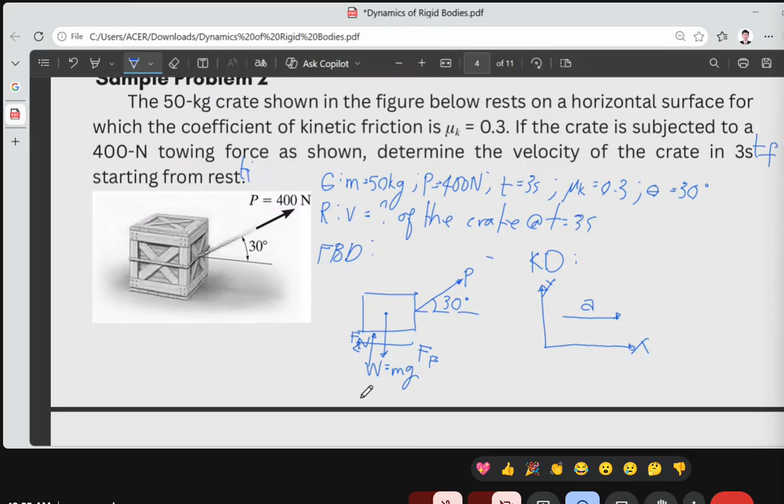So before we proceed dun sa solution proper natin, again, we must convert the given mass to the standard form, which is your weight. So weight is your mass times the acceleration due to gravity.

So the given mass is equals to 50 kilogram times yung kung ano yung ating acceleration due to gravity. Ano pong dapat natin gamitin in terms with your SI unit? Hello, audible po ba? Yes po, bali yung magiging gravitational acceleration ay 9.81 meters per second squared.

Okay, we have your 9.81 meter per second squared. And the answer for our weight, ano po ang weight natin? For the weight ay 490.5 Newton po. Okay, so you have here the 490.5 Newton.

So after determining the weight of the particle, we can have the summation of forces. For the summation of forces, we can first distinguish your y component. Kasi basically, most of the external forces that is acting on our FBD rely dun sa ating y-axis. So we have here the summation of forces in terms with your y is equals to m times your acceleration in terms with your y component.

And then for the establishment of our coordinate system, yung conventional way natin ng assumption, so positive upward. So sige nga, ano yung magiging equation natin in terms with your summation of forces in terms with y component, Claveria?

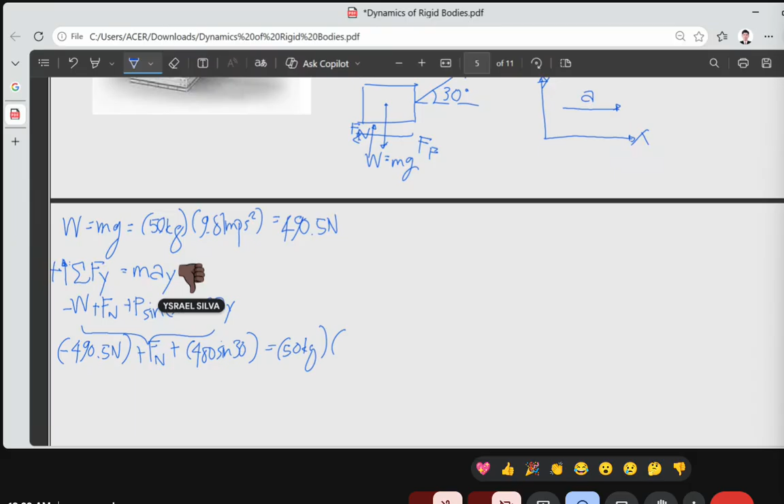Do we have the value for our acceleration with respect to the y component? Wala po. Bakit po sir? Kasi sabi dito sa problem natin, yung ating particle, yung movement niya specifically is the horizontal motion. Nasa x-axis lang siya. Hindi naman siya aangat, 2D yan. That's why yung corresponding value is 0, which means this term pwede na nating tanggalin.

So we can omit that part, then we can solve yung corresponding value for our normal force. Upon the mathematical manipulation, ang makukuha nating normal force ay 290.5 newtons. Kasi you're going to transpose this one, 490 maging positive siya, minus yung 400 sine 30. That's why you will come up with 290.5 newtons.

Nagsosolve po ba? Okay, sige po, so we can proceed. So after nun, we will have the summation of forces in terms of your x component. Yung assumption or the conventional assumption na meron tayo is positive to the right. So summation of forces in terms of x component is m times a sub x.

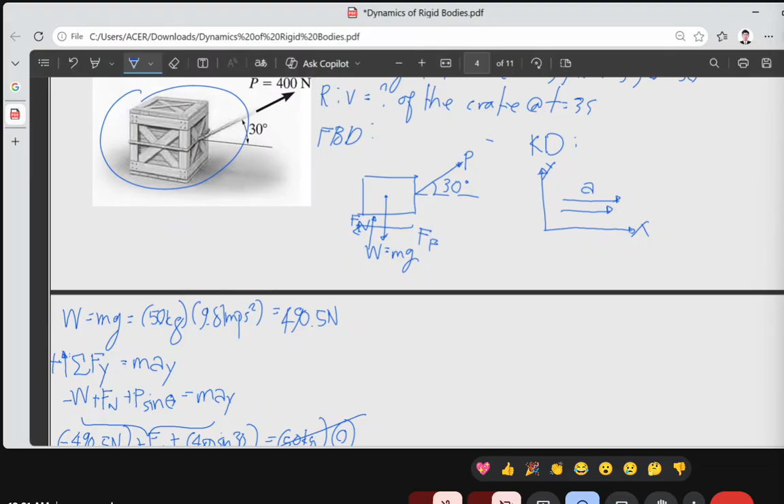Yung mga forces na nag-act sa ating horizontal axis, ano po kaya yung mga yon? Ano po yung mga external forces specifically? 0.3 na friction po. So lagyan natin friction force. Then yung P cosine 30 din po.

Yung applied force cosine 30, siya ba is positive or negative? Kung from to the right is positive po, okay, positive siya. Yung friction force po natin, siya ba ay positive or negative? Negative po, siya opposing.

So we can substitute or have the necessary parameters na unknown dito. For our friction force, it can be solved utilizing yung formula natin. Ano bang formula ng friction force natin? Sige nga, let's have magbuhat. Ang formula for friction force is kinetic friction times normal force.

Okay, that is correct. So ano po magiging friction force natin? Paki-solve nga po, Engineer Magbuhat. Meron tayong 0.3, tama ba? Ano ba yung kinetic friction natin? 0.3 times yung normal. Ang friction force po is 87.15 Newton. Tama po yan.

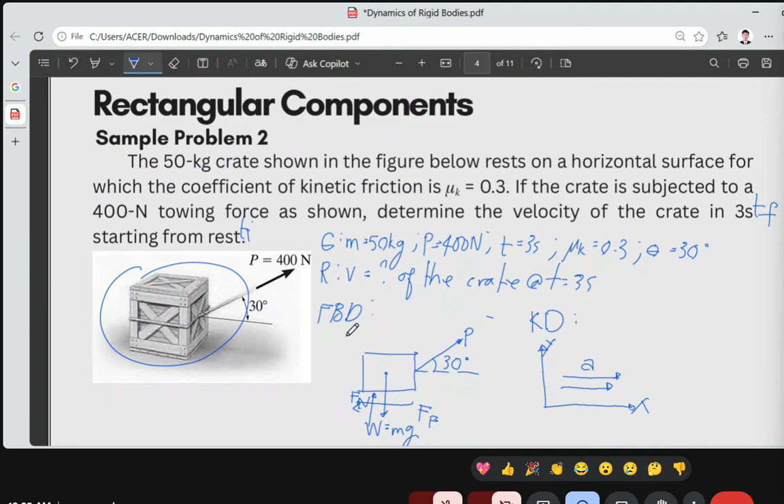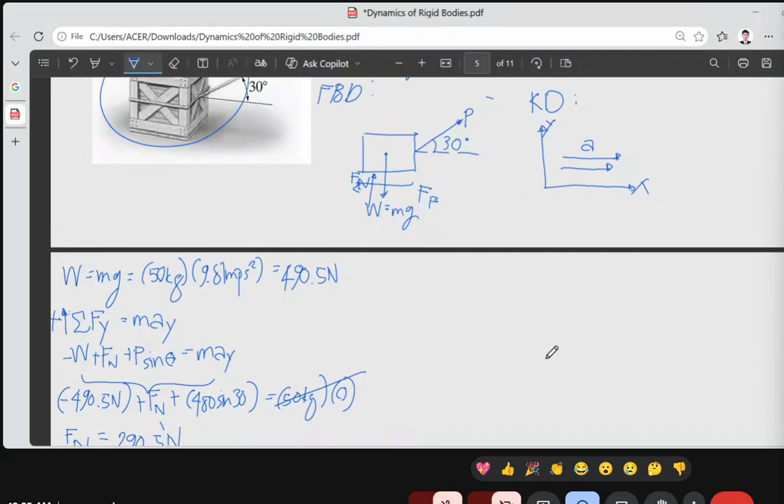So after nun, meron na tayong value na ating acceleration. Ang pinapahanap sa atin is yung velocity or final velocity when we have here the given final time. Alin po yung gagamitin natin? Meron tayong corresponding shortcut from our kinematic discussion: final velocity is equals to the initial velocity plus acceleration times time.

You have here the position is equals to the initial position plus the initial velocity times time plus 1/2 acceleration times time squared. And then your final velocity squared is equals to the initial velocity squared plus 2a times your position. Based sa tatlong equation na ito o tatlong shortcut, alin po kaya ang gagamitin natin?

So wait lang. Yun daw po yung gagamitin natin. So v is equals to the initial velocity plus acceleration times time. Meron na tayong value since with respect to your x component. We have here the value of your acceleration and your time.

Ano po yung maging value ng initial velocity natin? Engineer Marundan. Bakit po kaya zero? Bakit po kaya siya zero? Okay, exactly, at rest po siya. Hindi pa siya nagalaw. That's why the initial velocity of that particle is equivalent to zero or none.

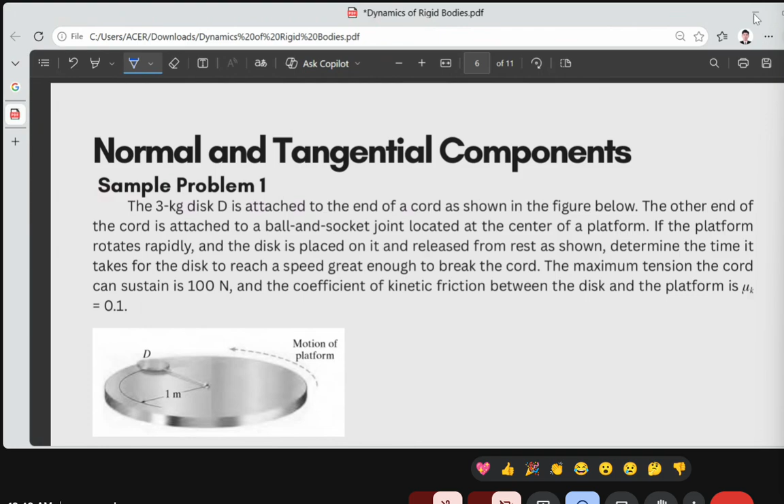Okay po, so we can proceed na with your sample problem number 1 under your normal and tangential components. Before we proceed, let's just have the recap regarding po sa ating NT system, or your normal and tangential components.

So dito na lang. Sa ating pong normal and tangential components, saan po nakabase yung origin po ng ating - sige, mag-drawing na lang po tayo. So, for example, meron tayo itong path. Yan po yung path ng ating particle. Yung particle natin is nandito, then after some time, nandito na po siya. So, paano po yung magiging axis niya in terms of your normal acceleration?

So, let's have nga Borbon. Hello po. Sir, present po. Ano po yung question? Kunyari po, ito si particle natin. Paano natin madidistinguish kung saan yung kanyang n direction? Yung path, yung motion niya pa ganyan. Sir, hindi ko po alam. Sige, next, maligaya. Hindi po, din po sir. Hindi rin po.

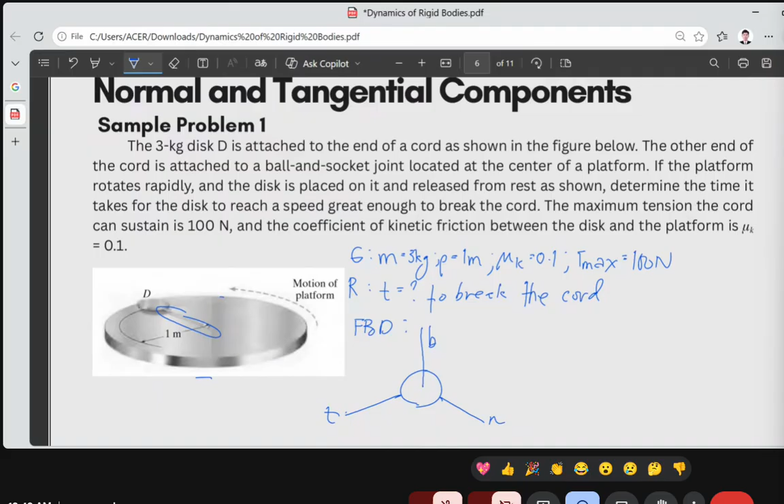Sige nga po, sister, kindly give po ng at least one external force na nag-act sa ating disk. Yung weight po. Yun, safe na sagot, weight. Sige po, weight po, which is saan po siya nag-act? Alin pong axis? Binormal. Okay, binormal, no? Pwede natin siyang i-indicate dito po. Tama no, weight pababa. So dito, for example, this is your weight, nasa binormal axis po siya.

Sige nga po, next, Benjamin. Sir, yung tension po, which is 100 newtons po. Tension, which is saan pong axis po siya? Sa ano po? Ayun po, saan po? Sa A po. Ano sa A, nasaan yung A? May A ba din eh? Doon po sa N po. Sa N, normal po, sa N, sa normal direction. Ano, this is your maximum tension.

And then next po, Baliwag. Ano po yung external force? Sir, may normal force pa po. Okay, tama, may normal force po, perpendicular with our particle. Yung mga safe na sagot. Lastly, ano po yung nawawalang isa pa?

May nawawala pa po bang force? Alin po yung nawawalang force? Engineer Galit, hindi po ba si Galit? Absent. Sir, present po.

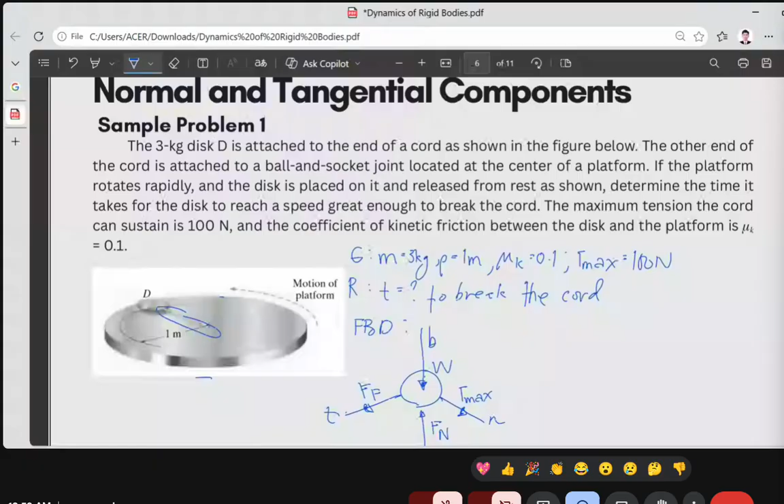Sir, bakit po siya in counterclockwise direction? Zoom po natin ng konti. Lipat ko lang po to dito. So explain po ng sir. Ganito, lumipat pa dun. Ano ba, bakit ayaw?

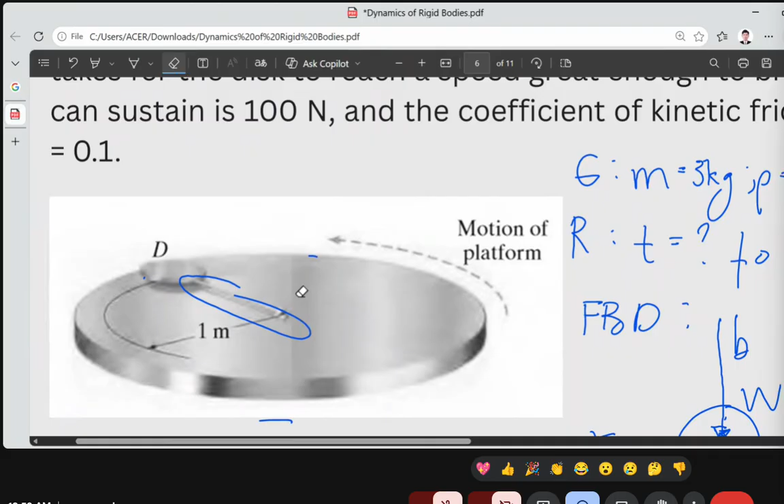Wait lang po. Sabi po dito, babaguhin ko lang tong part na to. Bakit ayaw mag-annotate? Sabi po kasi dito, yung ating pong motion, ano, mag-erase.

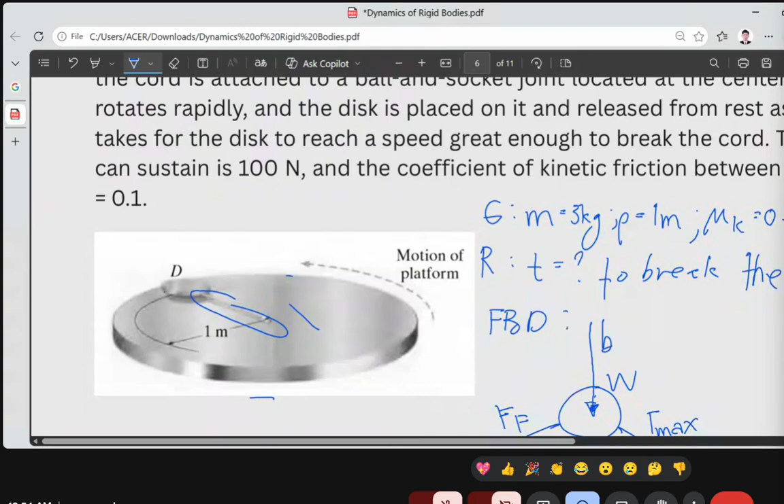Yun daw po kasi motion natin platform ay counterclockwise. Ito po yung platform and this is your disk. Yung disk natin is nasa taas po ng platform, and it is connected din po sa ating ball-and-socket joint dito sa ating center.

Sabi po ni Jardine Felix, dapat po yung friction force natin is nag-oppose, ibig sabihin dapat siya clockwise direction, dapat dito sa ating free body diagram. However, sabi po kasi sa ating problem is naikot na daw po yung platform natin into counterclockwise, naikot na daw siya papunta po dito.

Naka-counterclockwise direction na po siya, and then ating disc po is at rest, ibig sabihin hindi pa po siya nagalaw.

Kapag umikot po si ating platform, meron tayong coefficient of kinetic friction na magre-resist para siya ay mag-go along dun sa path na tinitake po nating platform, hindi po siya makakapag-resist kasi siya ay at rest. Kaya po siya magga-go along dito, it goes along dun po sa path na tinitake po ng ating platform. Sir, 'pag po ba ito'y nagalaw na?

Halimbawa, yung ating platform is nagalaw na in clockwise direction and then itong disk natin is nagalaw na into counterclockwise direction, or yung ating platform is counterclockwise and then this is nagalaw na in clockwise direction. So ang magiging direction ba ng force natin is in clockwise direction? The answer is yes po, kasi hindi na po siya at rest, hindi na po siya nadadala dun po sa ikot nating platform. So yun po yung reasoning behind that counterclockwise direction of your disk.

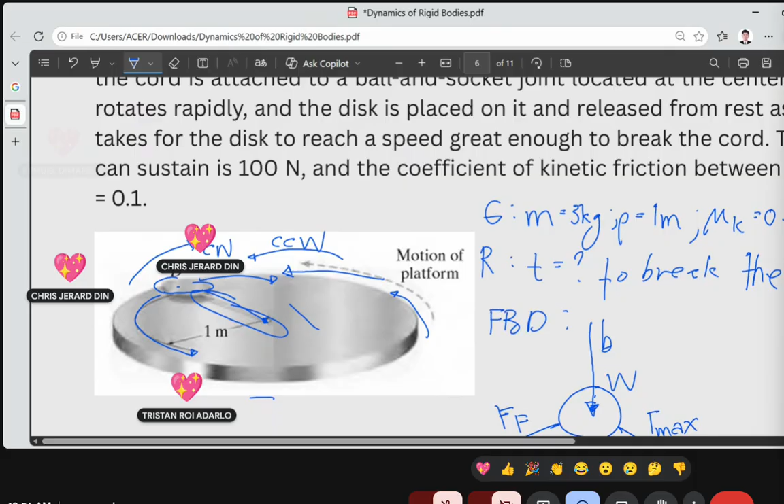Okay, nagets po ba yon? Nagets naman po, o sige po, nagets na po ng tatlo, tatlo yung nakita ko nag-heart. Bakit ayaw mabura? Wait lang po, I'll just unshare my screen. Nilolo ko yung ano, yung nabura na.

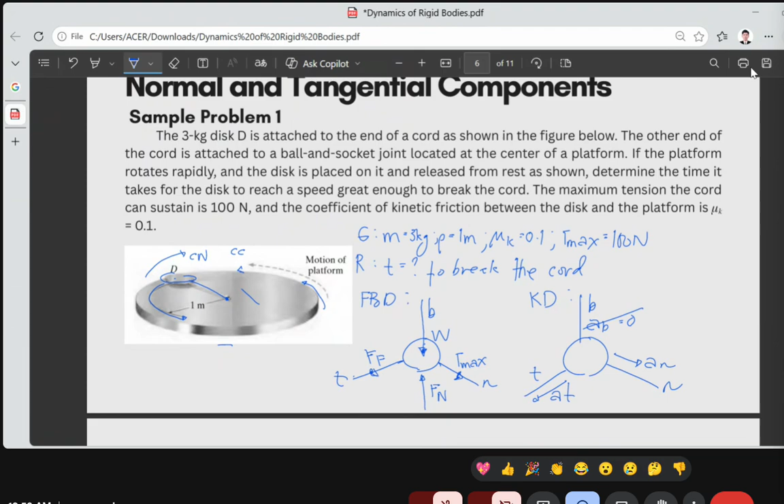So meron po ba tayong tanong before po dun sa solution? So wala, I guess wala po. So let's proceed sa solution natin. So for your solution.

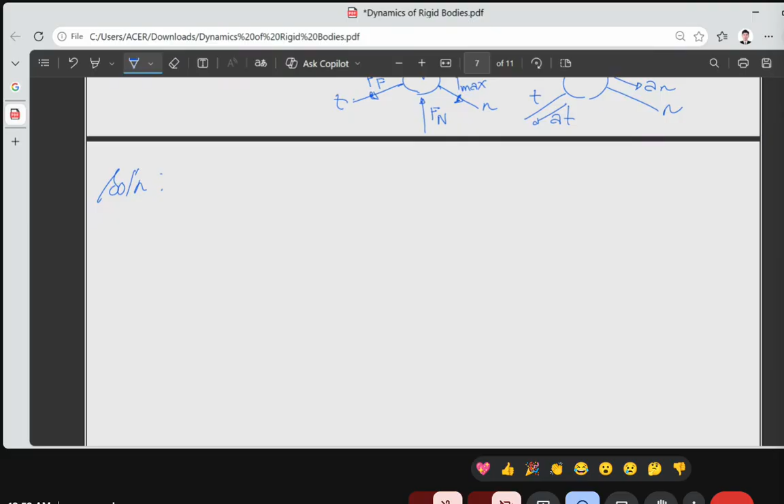Una po natin gagawin is that we're going to have your summation of forces. Either way, okay naman po, so unahin po muna natin summation of forces in terms with your n direction. So for your summation of forces in terms of your n direction, ano po yung magiging establishment of the coordinate system?

Munoz. Nandun po ba si Munoz? Sir, present po. Sir po, yung sa mass po times velocity over r.

Wait lang, wala pa po tayo doon. Nandito po tayo sa establishment ng coordinate system natin. Wait lang.

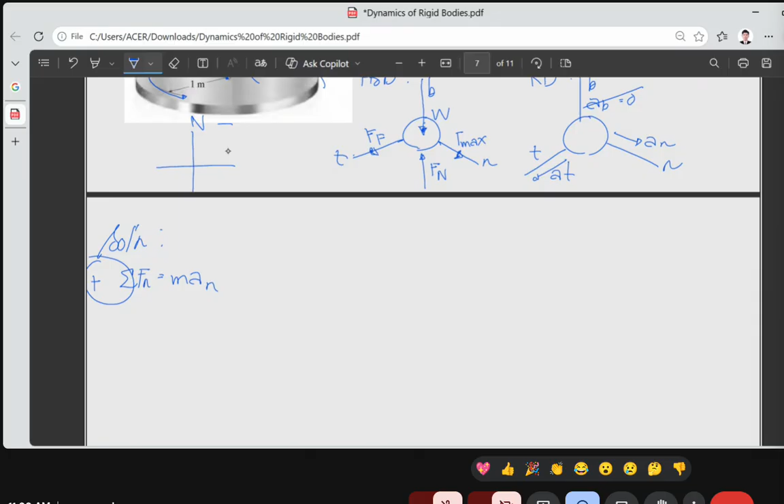Ano po magiging assumption? Positive po ba siya pasaang direction? Ganito po tandaan, north, east, south, west. So positive siya pasaan? Southeast. Dito po. So positive po siya in southeast direction.

So yung pong forces na nag-act sa ating n direction, ano po yung mga force na yun? We have, yun nga po, De Rojas. Sir, ulit niya po. Dito po, may assumption tayo na positive in southeast direction, yung ating pong sa n axis. Ano po ba yung mga external forces na nag-act sa ating southeast direction? Yun pong tension at saka po acceleration mo sa n.

Tension. So we have here your maximum tension. So yan lang po yung external forces natin. External force is equals to your mass times yung ating normal acceleration. And this normal acceleration can be rewritten through its formula. Ano po yung formula ng normal acceleration natin?

Petate. V squared over R po. V squared over radius of curvature. Radius po. So, sige, R na lang. Sabi nyo, density na naman yan. So, V squared over your R.

So, meron na tayong value ng maximum tension which is 100 newtons. You have your mass which is equals to 3 kilogram. Your velocity is unknown, and you have here your radius of curvature which is equals to 1 meter.

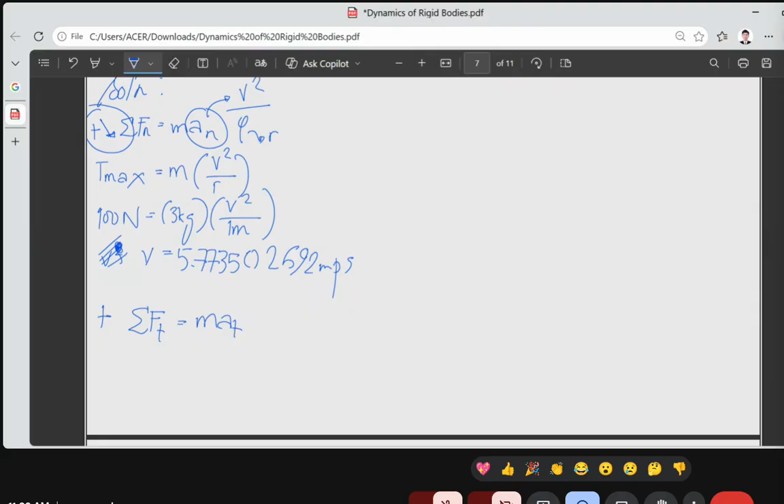So ano po yung magiging assumption natin for your T direction? De La Cruz. Sir, meron po yung friction equals... wait lang, mass. Establishment muna tayo. Ano yung assumption natin ng direction? Wait lang. Positive, pasaan direction kaya? Southwest po. Okay, southwest. No, positive siya in southwest direction.

Okay po. So, this friction force can be computed utilizing your formula of mu times your normal force. Ano po? So, pwede natin siyang i-rewrite, wala na palang space. So, siya po is magiging, ang mu po natin or kinetic friction is 0.1 times yung normal force natin. So wala pa po tayong normal force, normal force is equals to your mass, which is the 3 kilogram, and your acceleration or tangential acceleration.

Ano? So basically, we have here two unknowns. No, so we can solve that ngayon. So that would be our equation number 1.

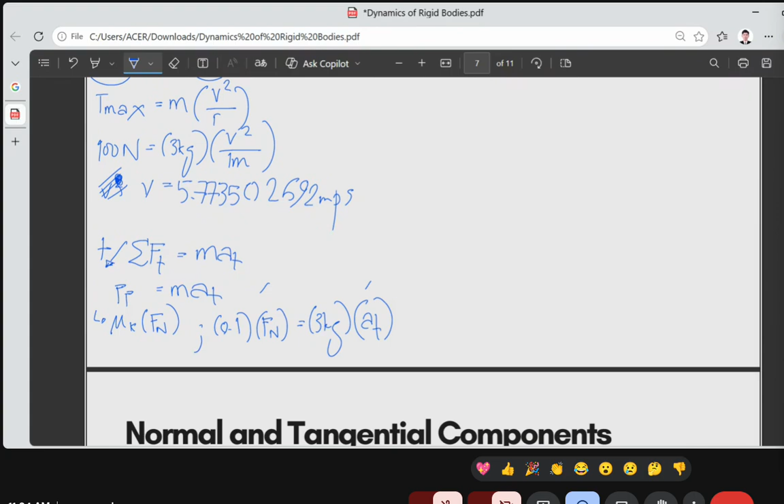So after that, we can proceed with your binormal axis. So we have here the summation of forces. So the normal or the conventional way of assumption in the vertical motion is positive upward. So summation of forces in the binormal is equals to mass times acceleration of binormal direction or binormal acceleration.

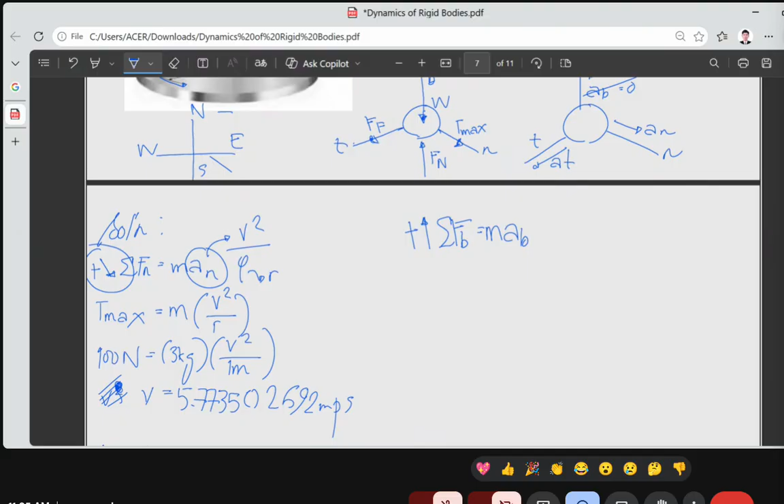Paano ba siya i-rewrite as equation? Negative W plus Fn, yung normal force natin, equals mass times the binormal acceleration. Kindly take note that the binormal acceleration is always equal to 0 — nakalagay yan sa ating concept related sa NT system, which means we can just omit or eliminate this term kasi 0 po siya, 0 daw po yung ating binormal direction.

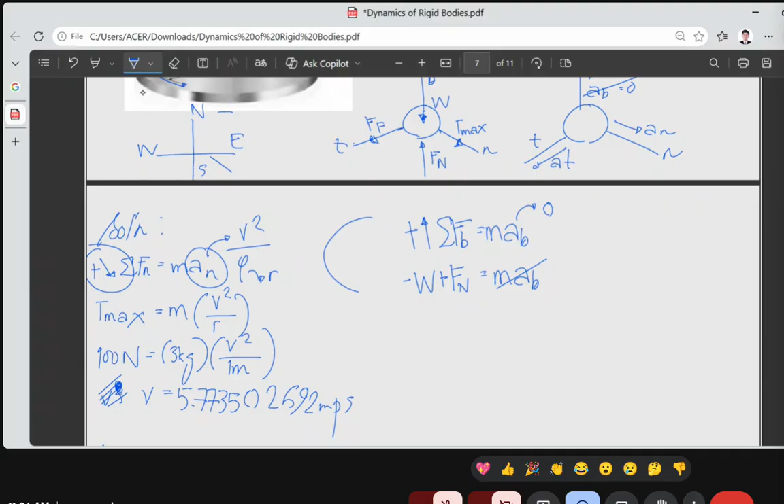Sir, always 0 po ba si binormal? Yes po, always 0 po ating binormal direction, kasi siya po is yung ating path na tinatake ng particle, specifically in the normal and tangential components, is along the curvature — hindi naman po siya tataas dun sa ating path.

So magiging value po nito is that yung normal force po natin is equals with your weight. So basically, your weight is your mass times your gravity or acceleration due to gravity. So ang magiging value po nating normal force is equals to your weight.

So ano po magiging value ng weight natin? Theta. Ano pong value? Negative 29.43. Ay bakit? Positive po, positive. Sige po.

29.43 newtons. Since meron na po tayong value na ating normal force, balik tayo dito sa equation 1 natin. May value na tayo dito, so which means yung magiging value po na ating tangential acceleration is equals to, ano pa may value po niya?

May magiging value niya, may lumabas. Sir, 0.981 po. Yun pong unit po niya, meter per second squared po.

Okay, that is correct. So after nun, meron na tayong mga necessary parameters to determine yung hinahanap na time — time to break the cord. For us to determine yung time to break the cord, again, we are utilizing our formula, specifically the shortcut formula in terms with our kinematics.

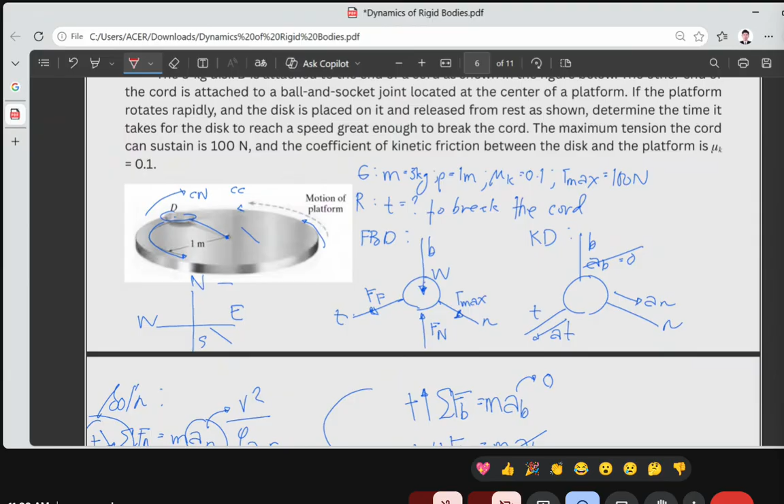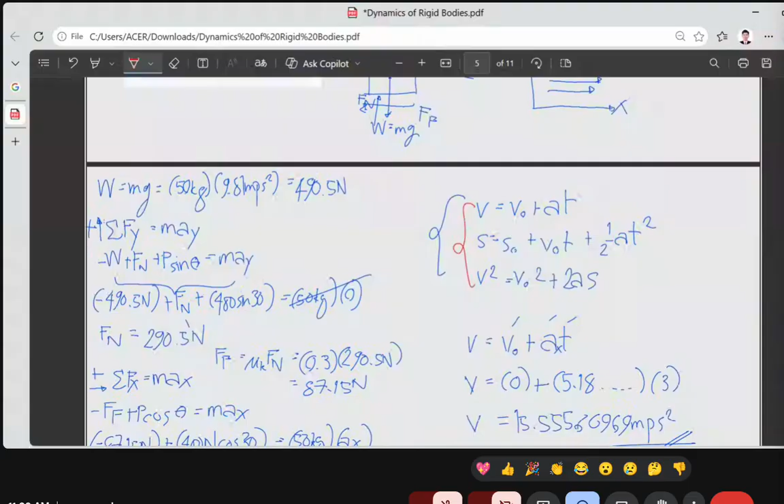Balik tayo dito. So among these three equations, alin po ang gagamitin natin dyan? Sir, yung kagaya po nung kanina, the final velocity is equals... kagaya kanina. Since we have the necessary parameters para sa ating determination of time to break the cord, kindly solve nga po.

So you have here the initial velocity plus your acceleration in terms with your tangential component times time. Hanapin po natin is your time. Yung velocity na nakuha natin earlier, which is approximately 5.77. Lagay lang po yung true values dyan — equals to, yung initial velocity natin is 0.

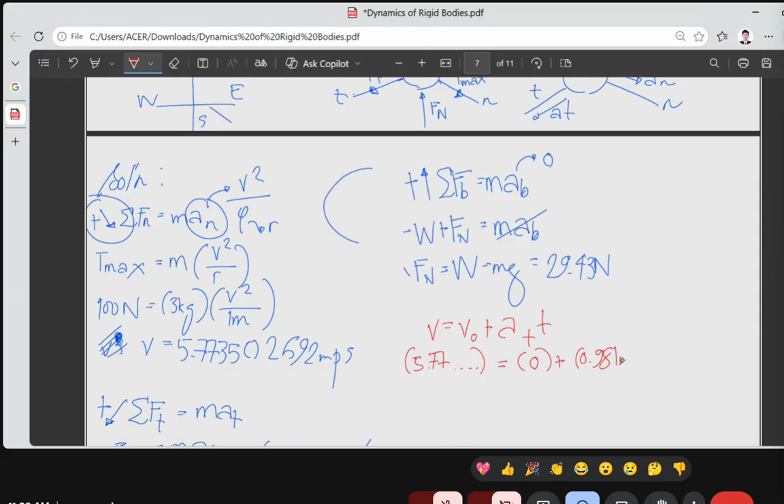Bakit po sir 0? Kasi po at rest po yung disk natin sa platform. Plus yung acceleration natin, which is your tangential 0.981 meter per second squared, and your time. So upon substituting, the value of time that we are going to obtain ay ano po kayang value niya?

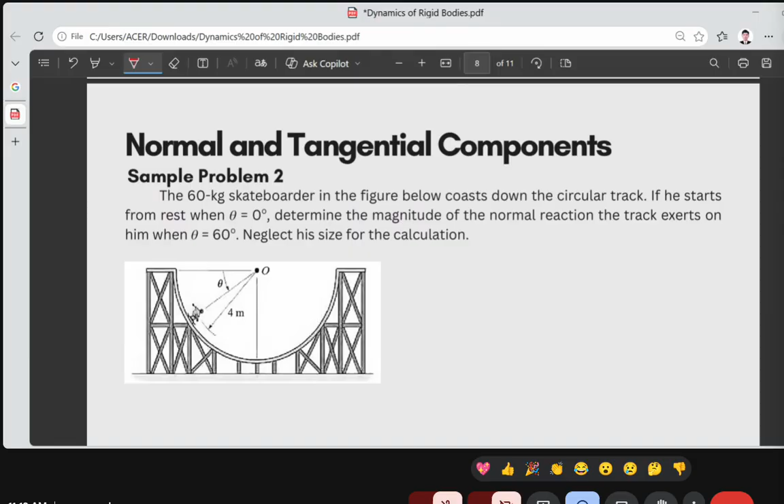So when a given angle is equals to 60 degrees, neglect his size for the calculation. Medyo tricky tong part na to ha, so sige before we proceed doon — we have here, set na natin siguro dito yung given dun sa baba. So for your given, ano po yung given natin?

Let's have Endaya. Sir, mass po is 60 kilograms. Okay, tapos ang radius po ay 4 meters po. Yung radius po niya is 4 meters. Ilan po ba?

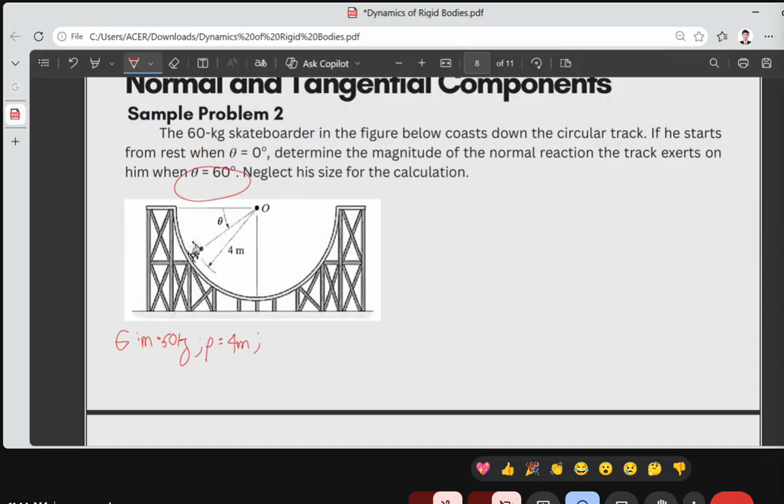Eh, how about this one? Di po ba siya given? Ang angle po is 60 degrees. Sige, wala na kayong 1 point ha. Pag sa midterm, you have here your given angle. State po lahat, yun po yung magiging given natin. And then, for your required, ano po hinahanap natin? Ang hinanap po natin, Sir, ang atin po yung normal reaction. Okay, yung normal reaction or your normal force. Ang hinahanap natin, normal force. Okay po.

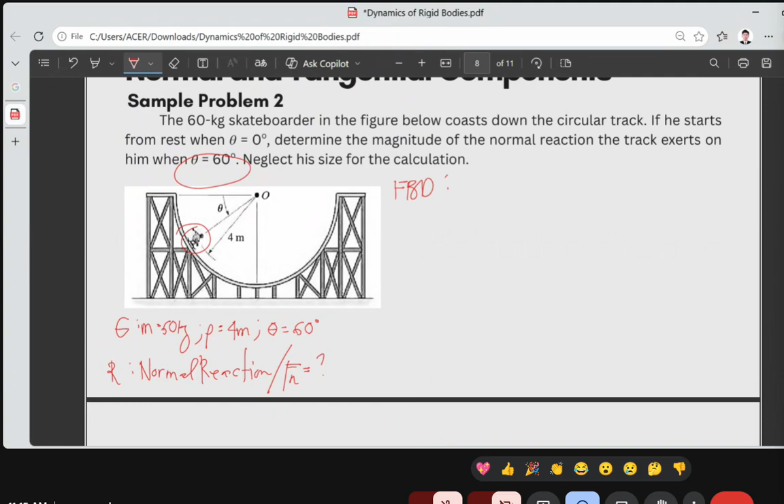So, before that, we are going to have your free body diagram. Dito na tayo medyo magkakandalito-lito. So, the particle that we are going to analyze is yung skateboarder natin. So, ano po ba yung magiging value niya? Ganito po, yung skateboarder natin is nandito. So, zoom natin ng konti.

Yun yung skateboarder natin. And then, paano tayo mag-distinguish ng ating N direction? Sige nga po, Shane. Po ba si Shane? Yes po, sir. Sige po, ano po ulit yung question? O, di ba parang kakamulat-mulat lang ni Shane. Yung paano natin madi-distinguish yung N direction from this particle, yung skateboarder, ang particle natin. I'm not sure po. O sige, hindi ka sure, so ano yung hula mo na lang?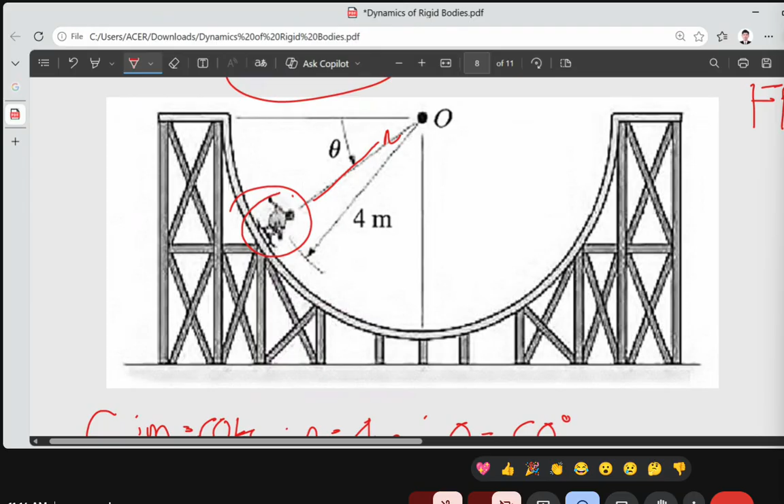Towards the center po. Okay, ano? Towards the center, so ito po yung magiging N direction natin. Hindi pa tapos, Shane. So, ano po yung magiging T direction natin? O kaya, Pass. Babalikan ko din kayo katulad kayo ni Borbon at saka ni Maligaya.

Sir, ano po, direct following the direction of the motion po. Okay, ibig sabihin na, since ang ating motion is papunta po dito, basically pababa po siya. So, the tangential or our T direction is along, paganyan din po siya. Okay po, so basically, good.

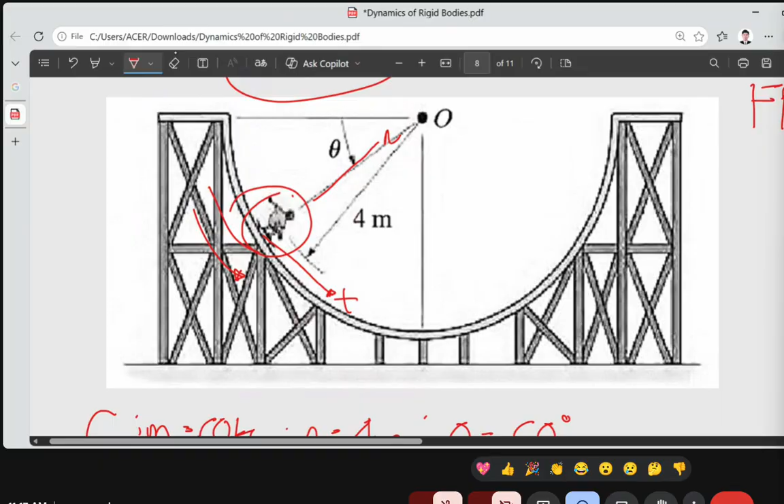Ano natin, so dire-draw po natin siya sa ating FBD. So, wait lang. Opo, opo. So, dito, magkaroon tayo ng direction natin. Yung ating particle, ito yung skateboarder natin. So yun daw pong along po siya. Dito yung origin. So, we have here your N direction, and this is your T direction.

Ano po, so ang mag-a-act sa'tin, ang una pong mag-a-act diyan, tatandaan niyo is your weight. Yung weight natin is always perpendicular doon sa ating particle. So, perpendicular po ba papunta dito? No po, always constant pababa po siya. Okay, so we have here your weight. We have here ano pa po yung mga forces na yun, we have here normal force or your normal reaction, this one po siya. So, yan po yung ating normal force na nag-a-act.

Meron pa po bang tayong hinahanap or meron pa po bang unknown dito sa ating problem? Palagay niyo po, ano po pa yung dapat i-indicate natin sa FBD natin? Sige, o sige nga Silva. Sir, ilalagay ko rin po natin yung angle po. Okay, basically, we need to indicate yung angle, which is from your weight papunta dun sa ating T direction. So siya po is yung angle o yung ating 60 degrees angle. Kasi nung nandito daw po siya ay 0, so nung nandito na po siya sa part na 'to, yung which is yung dini-distinguish natin, siya po is 60 degrees na po. Ano, so yun po yung ating magiging free body diagram natin.

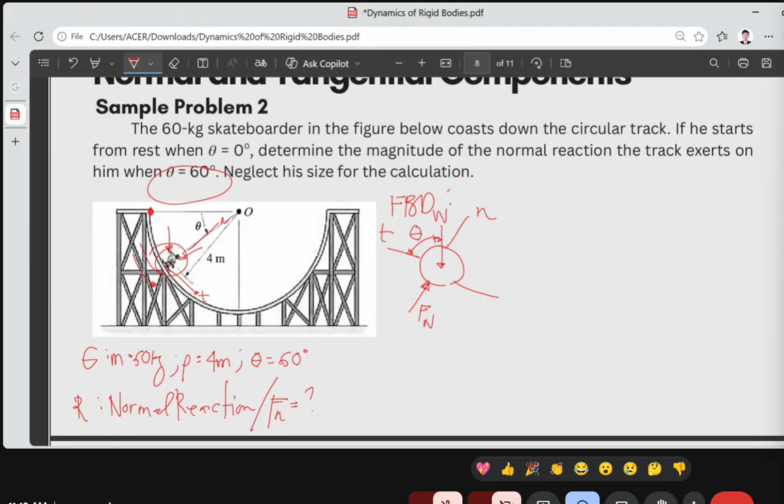So after nun, we will also make yung corresponding kinetic diagram naman natin. Yung kinetic diagram dito, katulad lang po siya ng kanina. So we will have here your particle, this is your N direction. Yung motion po niya, again, towards the end. So this will be your normal acceleration, and then your tangential is dito po siya sa path na to, your tangential acceleration. Now, that would be your kinetic diagram.

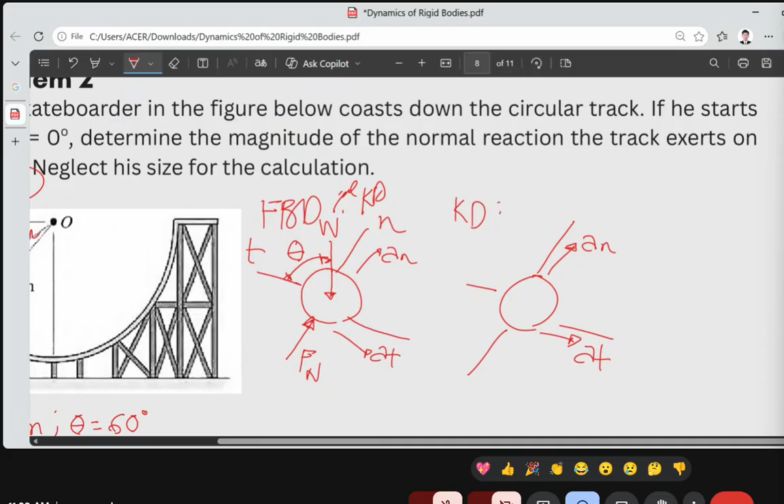Sir, pwede po bang gawin na namin is magkasama po? Yes po, so pwedeng indicate niyo is your normal acceleration and then your tangential acceleration. Again, if gusto niyo po is naka-integrate na yung ating kinetic diagram dun sa ating free body diagram, so you must include the title, free body diagram and kinetic diagram. Either way, okay lang po sa akin yan. Okay po, so do you have any questions or clarifications? Wala naman po, so we can proceed na po sa solution. Sige, let's have your solution.

So, for our solution, what should we do first? We will take the summation of forces in terms of our normal acceleration. Normal acceleration muna. So, what is our assumption here?

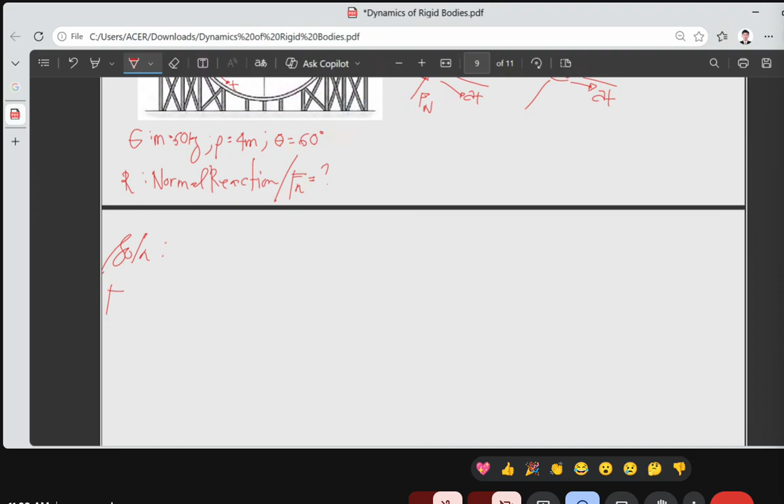So what's our assumption? Positive at northeast direction. Okay, so positive daw at northeast direction.

Okay, so what are the forces that act in our northeast direction? Let's have... Normal force, positive. Okay, normal force, minus the weight, times sin theta, which has a corresponding angle. So that's why sin theta equals...

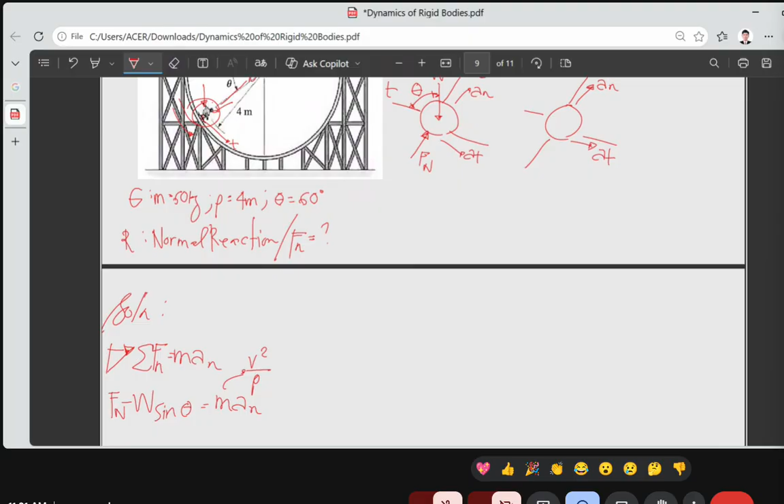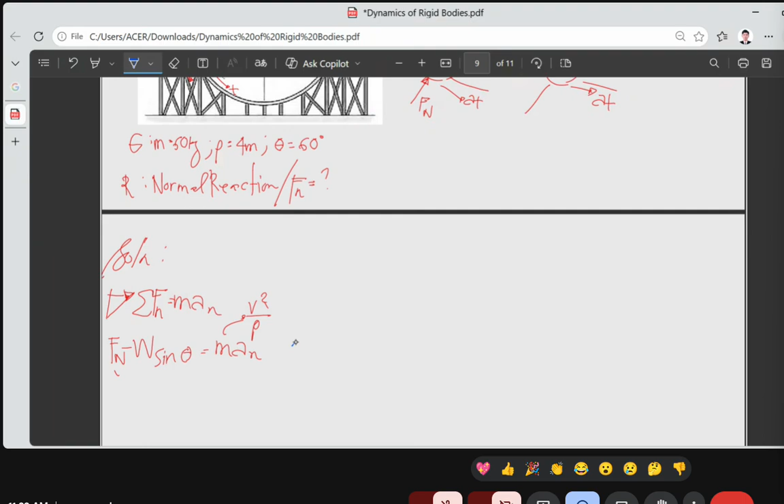Mass times your acceleration. Mass times your acceleration. Again, your normal acceleration can be rewritten as v squared over your radius of curvature. But since we don't have the value of our velocity and also the value of our normal force, that would be our first equation. Let's just write this since we don't have the value yet. This is your equation number 1.

So after that, we can proceed with our next summation of forces. The next summation of forces will be in terms of our T component or T axis. So what's our assumption here? Positive siya. Let's check, Martinez... ano ba si Martinez?

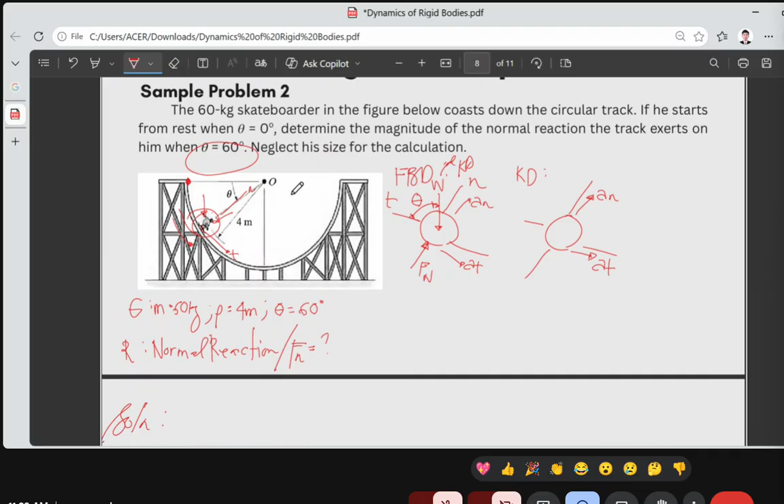Martinez, absent. Katam, sir, positive siya sa southeast direction. Okay, let's check. Ayun, wala na. Positive siya sa southeast direction. So tama naman, southeast. So dito po siya, let's write this.

Southeast direction. So what are the forces that act on our T component? Engineer Katam: Sir, yung weight po, tas cosine theta. Tapos yung... weight, cosine theta, and then your mass times acceleration.

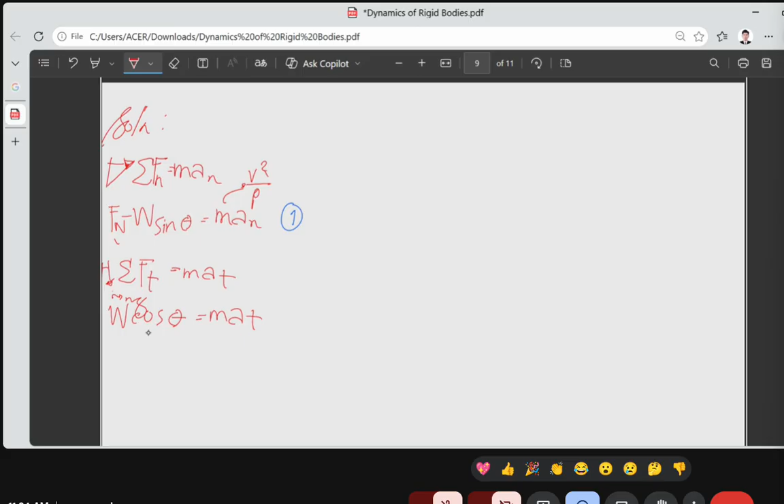So basically, we have here the value of your weight times cosine theta, where theta is to be distinguished later, and then your mass times your tangential acceleration. We can simplify this since your mass is equals to your weight over your acceleration due to gravity. When we simplify this, what happens is your tangential acceleration is equals to 9.81 cosine theta. So that's what we'll use.

So sir, after that, what should we do next? Since we'll get stuck there otherwise. Is there anything acting on our binormal? Wala man tayong nag-a-act sa ating binormal. So we have here your N and your T.

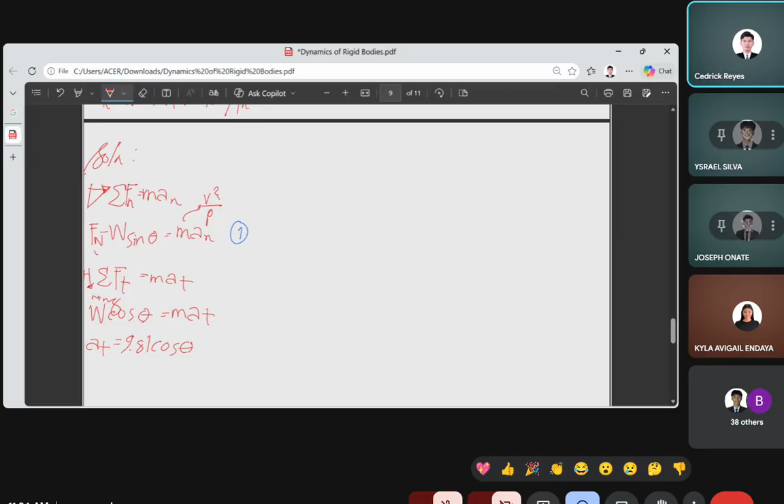What we'll do is have the differentiation of our position. Kasi gagamitin natin siya. Since we have tangential acceleration, we are going to utilize the relationship of our velocity with our position, which is the third relation in our general formula.

Engineer Karandang, what is that relation? Absent din po si Karandang. Javier, di po si Javier? Yes po, sir.

Okay, yung VdV is equal to A ds. So your VdV is equals to the tangential acceleration times ds. Sir, paano po natin siya gagawin? First, what we need to get is the rate of change in your position. So sir, paano po siya makukuha? Kasi from our position, specifically sa ating circular motion, meron tayong radius times your angle.

So that's how we get our position if it's in circular motion. So it is radius, basically this is your radius and this is your angle or your arc angle, so it's a combination of circular motion and arc length. So sir, paano yun? For example, this one.

Let's go back to our example. This is the origin, this is the particle, for example this is our particle which is your R, and this is your particle after some time, that would be your R prime. So this part would be your angle, and this arc, specifically the arc, because this line is the rate of change in position. The line, medyo gulo-gulo nito. So the arc from the initial position to the final position, that would be your S.

Ano po, yung position natin, yung S natin is equals to R theta. Kapag po dini-differentiate natin si position, we will obtain ds is equals to R d theta. Ano, kapag po na-differentiate natin si R d theta,

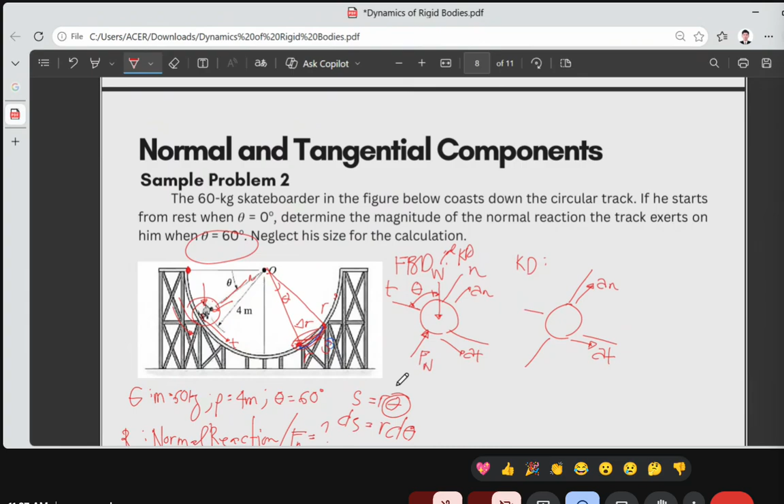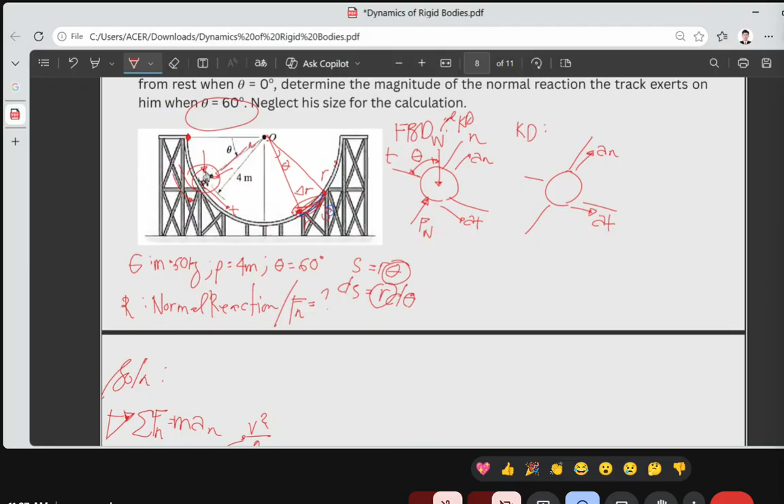Pwede po natin siyang gamitin mamaya for integration. Sir, bakit po? Kasi you have here the corresponding value of your R. Ano pong value natin sa R? Adarlo? 4 po, 4 meters. Tama, 4. O sige.

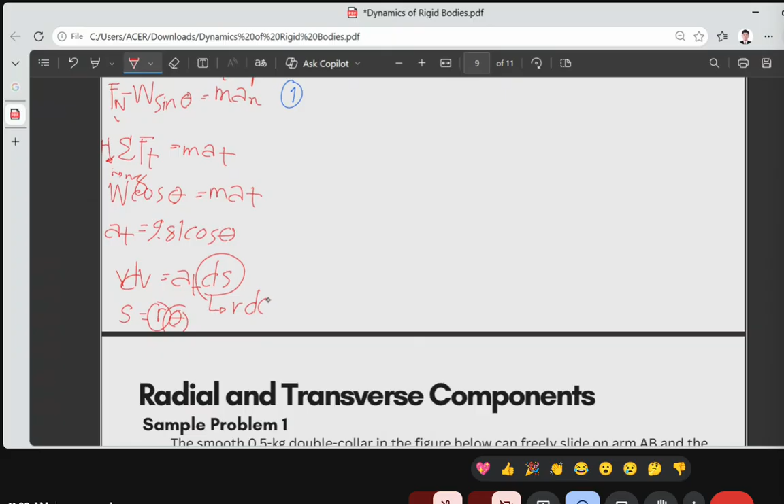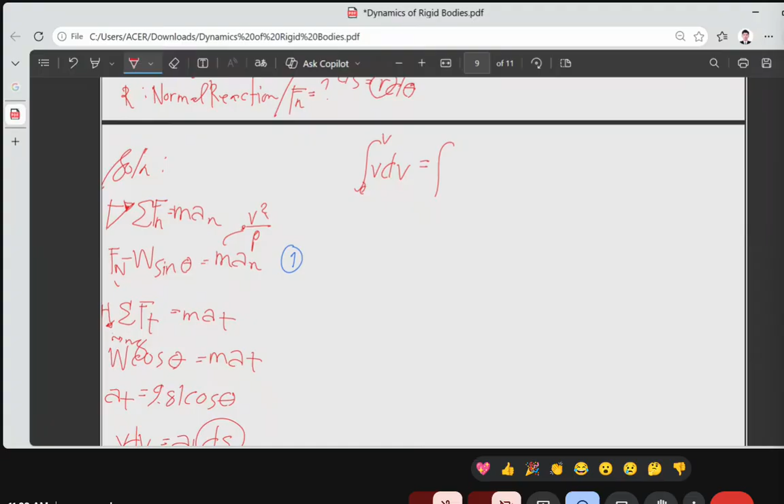So kapag po in-expand natin, we're going to expand this ds, rewrite as your r d theta. So pwede na po natin siyang i-integrate. Sige, ganito po yan. We have here your v, integration of v dv. Now evaluating from v to 0, since there is no upper and lower limit stated. And for your ds, pwede po natin siyang isulat as,

yung a natin is your 9.81 cosine theta times yung ating 4 d theta. Ang ating differentiating variable, for the upper and lower limit, would be our theta. Given po sa problem, meron daw po tayong initial theta, or initial angle of 0, and the final angle is 60. So that would be your upper limit, 60, and the lower limit, 0.

Kapag po in-integrate natin si v dv, we will obtain v squared over 2, evaluating from v to 0, is equals to, kapag po in-integrate natin si 9.81 cosine theta times 4 d theta, ma-integrate lang po natin dyan itong cosine theta, so we will obtain 9.81 sine theta times 4. Naka-bracket po yan, evaluating from 60 to 0.

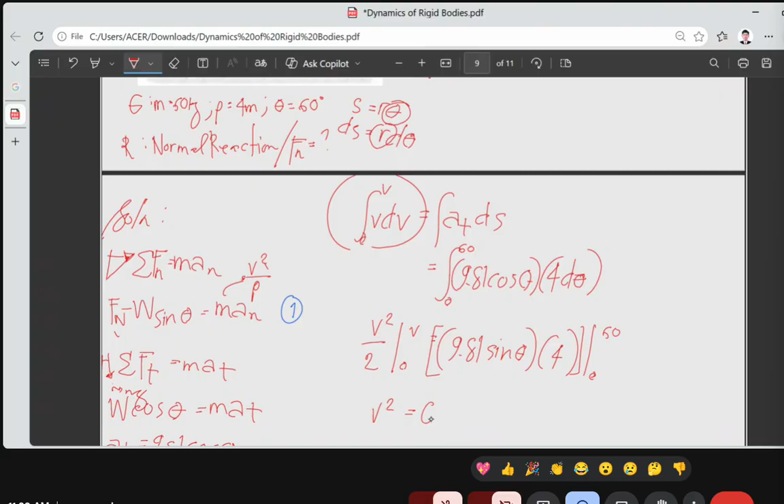Ano po, kapag po ganyan, ano makukuha po nating value na ating pong v squared? Sir, andito po. Sir, wait lang, sige po. 67.96567369. 67.96, tama po ba? 9656736 meter squared per second squared.

Sir, bakit po ganong unit? Kasi po, hindi po natin ti-take yung square root po ng ating velocity. Sir, bakit hindi po natin i-take? Kasi, again, this velocity squared will be utilized sa ating pong formula, o sa ating pong equation number 1.

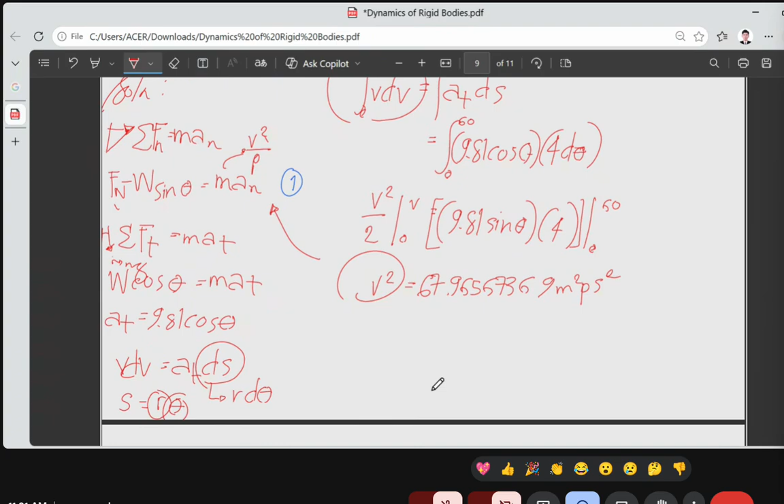Lagay niyo yung v squared value over yung radius of curvature niyo, which is equal to 4 meters. So after nun, you can obtain the value of our normal acceleration, or our normal force. Upon solving, ano po yung magiging value niya? Sure, yung value po is 1529.227713 Newton. 1529.227658 Newton. Okay po.